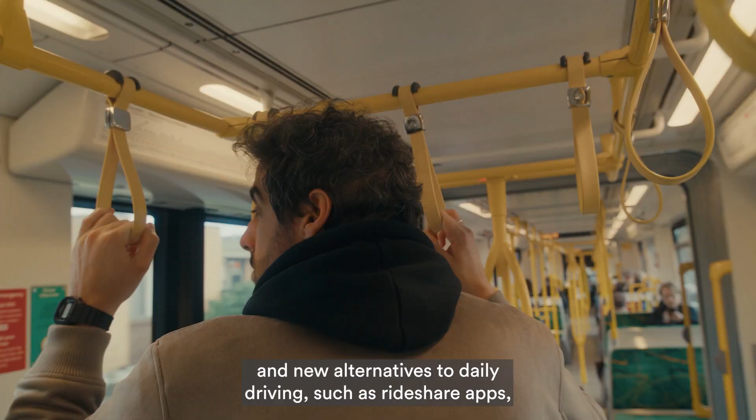However, more recent expansion of mass transit systems, a clearer understanding of the environmental impacts of cars, and new alternatives to daily driving, such as rideshare apps, bicycle share companies, and the prevalence of remote work, has led Americans to slowly reduce their dependence on cars. This car dependence has influenced development policy over the decades, driving the construction of ever more elaborate parking systems.

Today, there are over 2 billion parking spaces in the United States, more than enough to cover the entire surface of Connecticut, an estimated 3 to 8 parking spaces for every car in the United States.

A 2022 driving habits survey by U.S. News & World Report found that nearly half of all drivers have reduced the amount they drive compared with before the pandemic, and over 60% have reduced their driving because of higher gas prices. The youngest generation of drivers is obtaining licenses at a slower rate than any generation before them, trading personal cars for Metro passes and rideshare apps.

Municipalities have noticed these shifts and responded by beginning to eliminate parking minimums for new development in transit-oriented communities. In 2017, the city of Buffalo, New York was the first in the United States to abandon parking minimums. Since then, other cities have followed their lead, from Santa Monica, California, to Hartford, Connecticut. These shifts in driving habits expose the latent possibility for more efficient and less expensive new development.

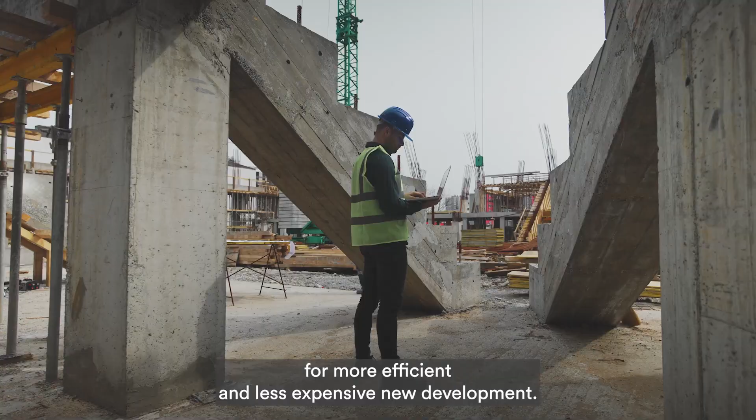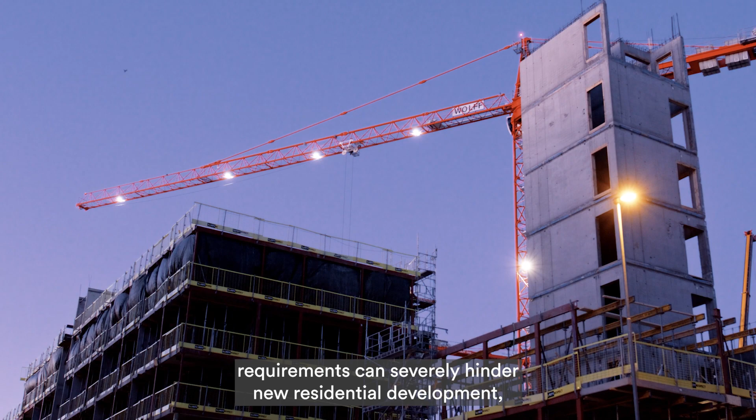According to construction engineering firm WGI, building a new parking structure costs nearly $28,000 per space. The expense imposed by outdated parking minimum requirements can severely hinder new residential development, further exacerbating ongoing housing shortages.

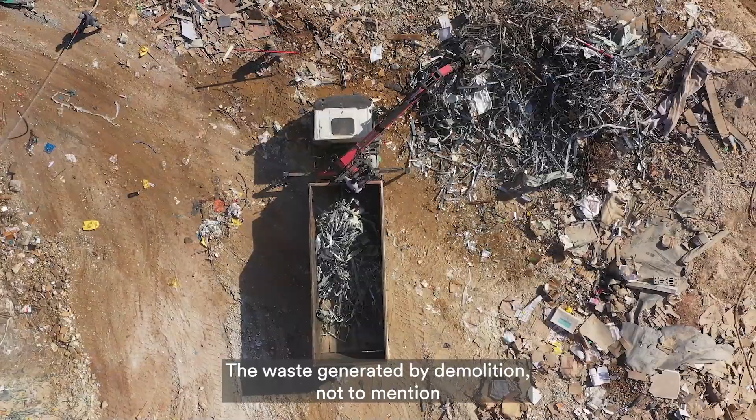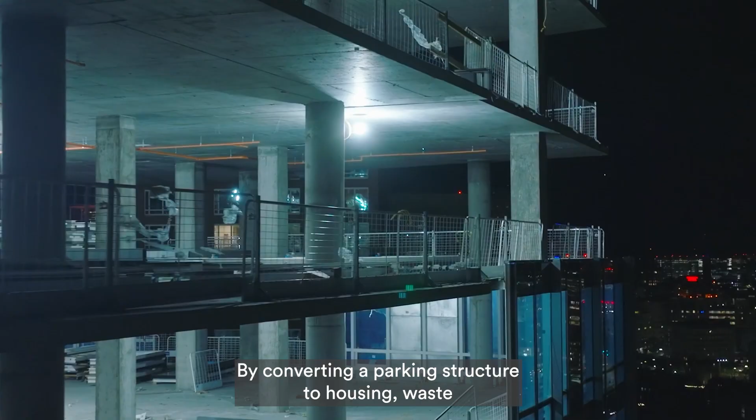Eliminating previously built parking structures will have its own negative impact. The waste generated by demolition, not to mention the environmental impact of new construction, makes adaptive reuse an attractive option. By converting a parking structure to housing, waste is minimized and embodied carbon reduced. Starting with an existing structure and eliminating the demolition phase altogether also reduces the construction timeline.

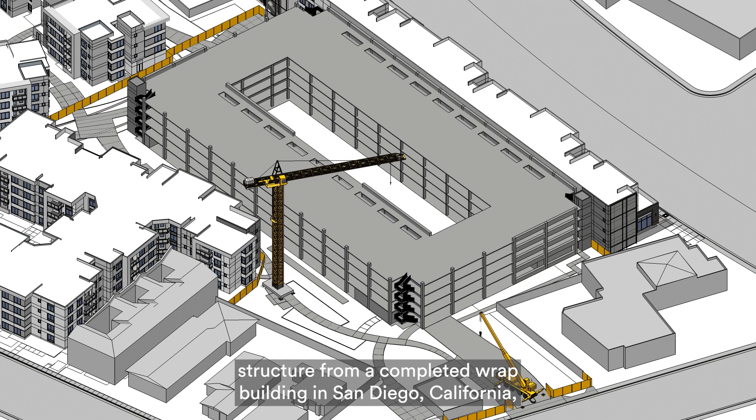A few years ago, KTGY's Research and Development Studio proposed a design concept for repurposing underutilized parking structures for housing. Starting with an existing parking structure from a completed wrap building in San Diego, California, we reimagined the donut-shaped standalone structure, inserting factory-built steel modules to create a new housing concept, Park House. The proposed Park House design repurposed 1,091 parking spaces to achieve 119 one- and two-bedroom units.

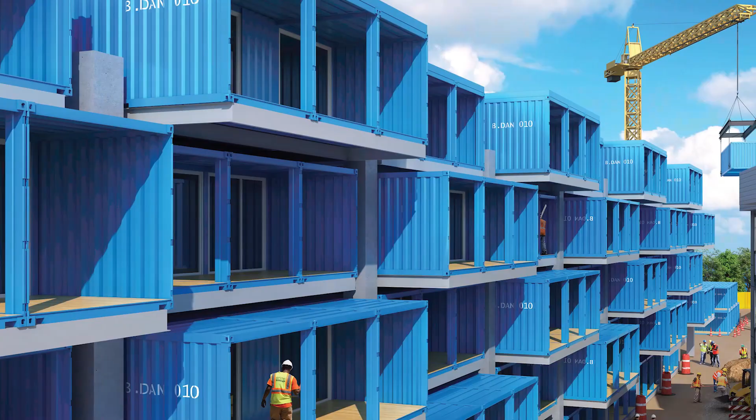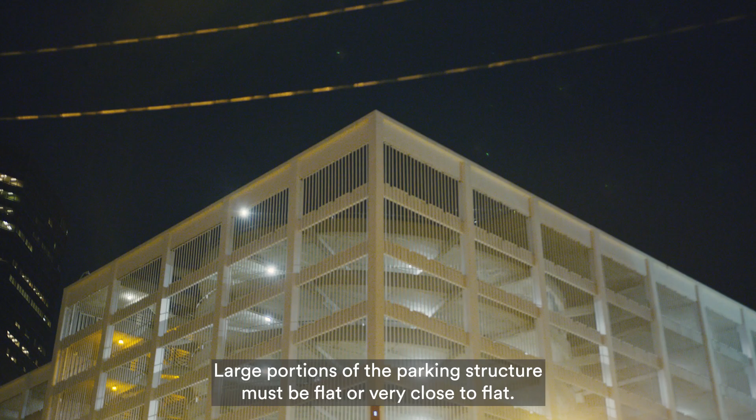Developing the Park House concept taught us some important things. 1. To effectively adapt a parking garage for residential, large portions of the parking structure must be flat or very close to flat. 2. Working around the ramp presents a challenge, but its central location makes it a natural fit for the community courtyard space. 3. Distance between floors should be maximized, allowing for at least 7 feet of clear height within the units.

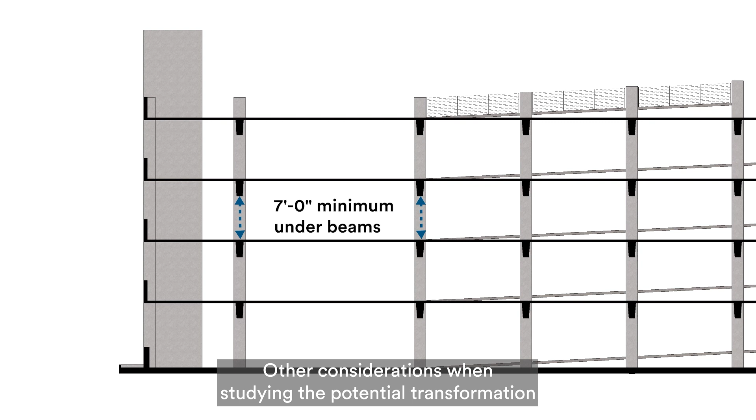Other considerations when studying the potential transformation of a pre-existing parking structure include intrusion into interior clearance height, structural capacity, total building square footage, stair and elevator locations, site access points, and proximity to adjacent buildings.

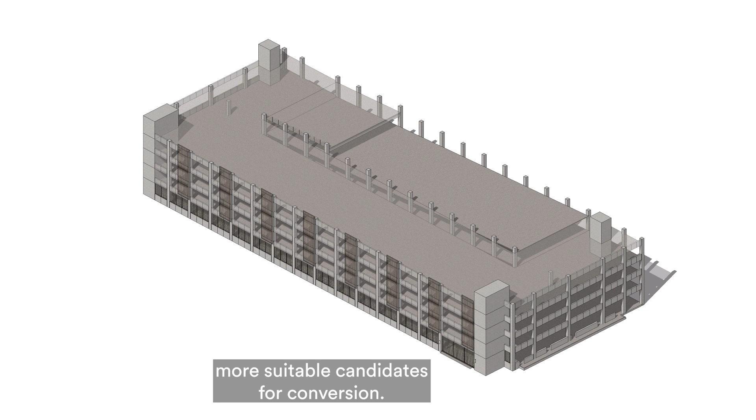Other building features, while not critical, may also indicate more suitable candidates for conversion. A wide column grid allows larger, unobstructed unit areas. It's also important to note that local building height limits may restrict the ability to construct units on the top level of the parking structure.

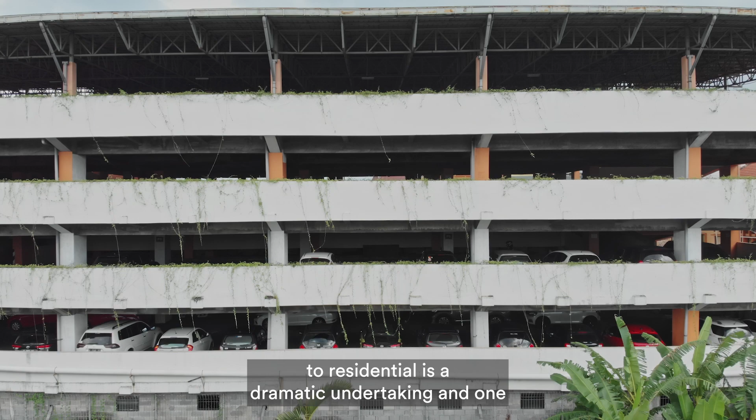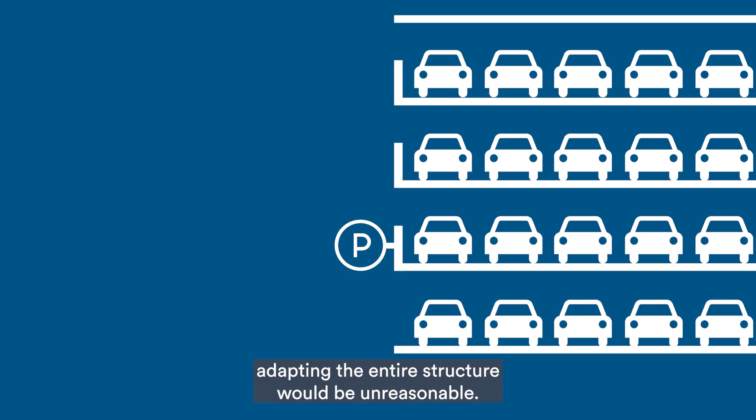We also learned that transforming an entire parking structure to residential is a dramatic undertaking, and one that many multifamily developments won't fully commit to all at once. Consider a parking structure where just half the floors are consistently empty or only a single floor. Adapting the entire structure would be unreasonable. A smaller incremental transformation, however, provides flexibility and reduced overhead, enabling building owners to respond to the needs of residents while adding value to underutilized spaces, all within existing capacity.

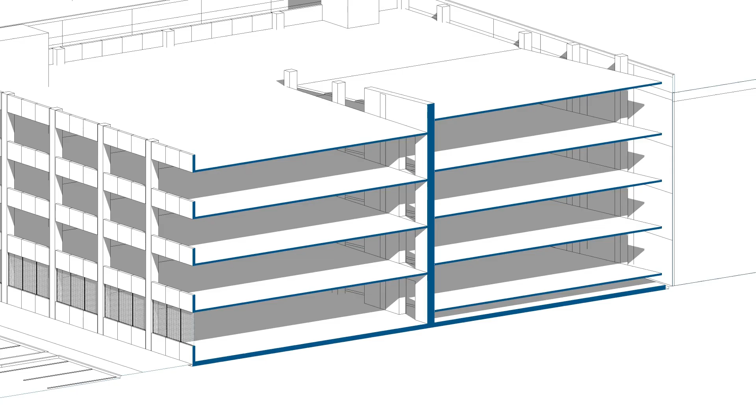Taking what we've learned from our first concept, we've now developed an incremental approach to repurposing parking structures: Parkhouse 2.0. Using the 561-space parking structure from a KTGY wrap building located in San Jose, California, as a case study, the research and development studio reimagined how a parking structure could be modified incrementally, creating a phased approach to this adaptive reuse solution.

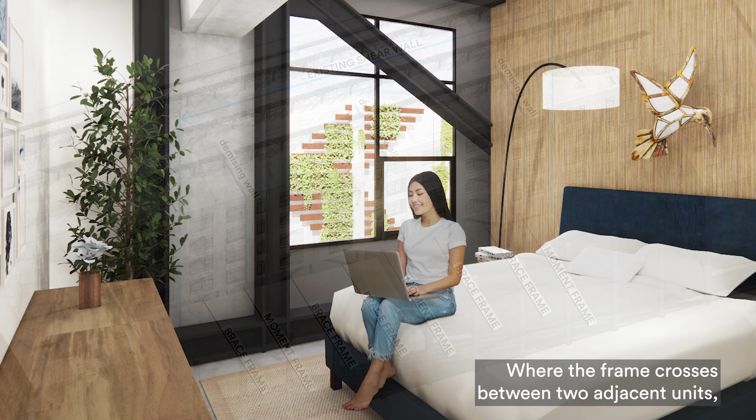To prepare the concrete structure for transformation, first a short extension of the highest portion of the ramp is removed, and the shear wall adjacent to the ramp is replaced with brace frames and moment frames. This allows for the future addition of units in those areas. Looking ahead to where the future units will be located, brace frames are used in places where the entire frame fits within a single unit. Where the frame crosses between two adjacent units, a moment frame is used instead.

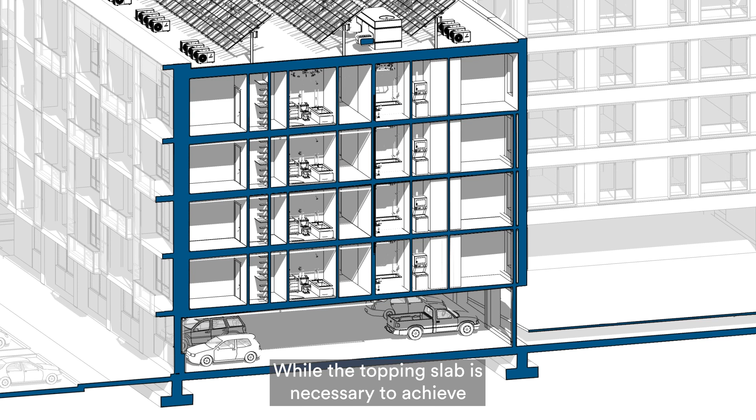To maintain a 1-hour separation between the different occupancy types of parking and residential during each phase of the transformation, a topping slab is added to the parking plate, maintaining a level floor surface and creating the concrete thickness needed for a 1-hour separation. While the topping slab is necessary to achieve building code requirements, it's important to maintain as much height clearance as possible between the levels of concrete.

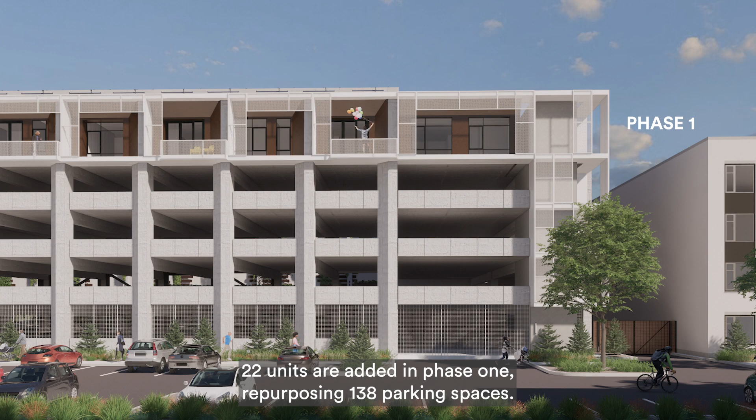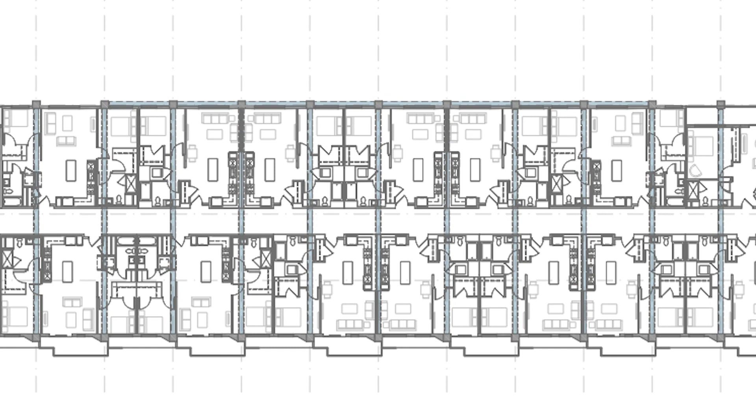The initial addition of units begins with the highest level of the garage. 22 units are added in Phase 1, repurposing 138 parking spaces. A sloped amenity ramp and utility chases running vertically along the exterior of the building are also added during the first phase of construction. Pipes servicing the units run toward the exterior of the building, traversing down through vertical chases running along the facade. All plumbing and utilities run within the existing structural bays to avoid routing beneath deep transfer beams and compromising clear heights within the units. Heat pump refrigerant lines also run within these vertical chases to route from rooftop heat pumps to individual units.

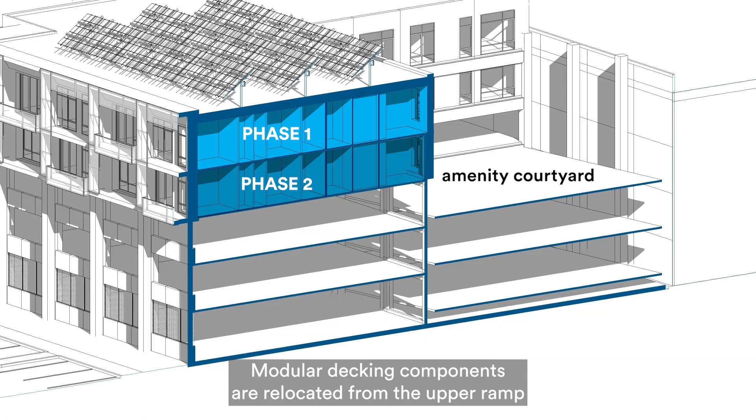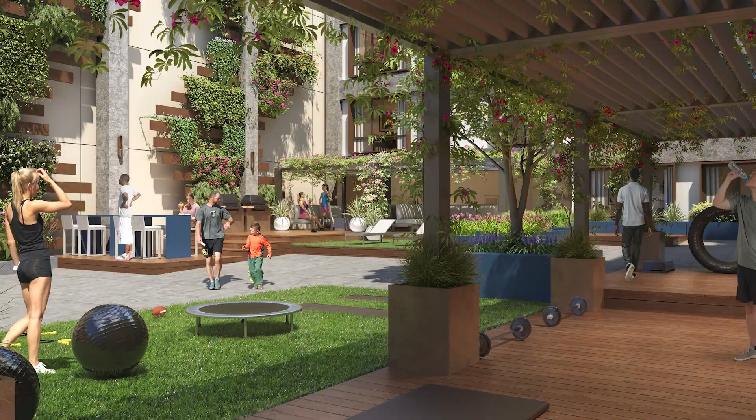During the second phase of construction, the top level of the ramp is removed, forming an amenity courtyard on the ramp below. Modular decking components are relocated from the upper ramp to the level below, creating flat areas for amenity programming along the winding sloped walkway of the pre-existing ramp. In Phase 2, 23 units replace 122 parking spaces on the second to highest level of the structure.

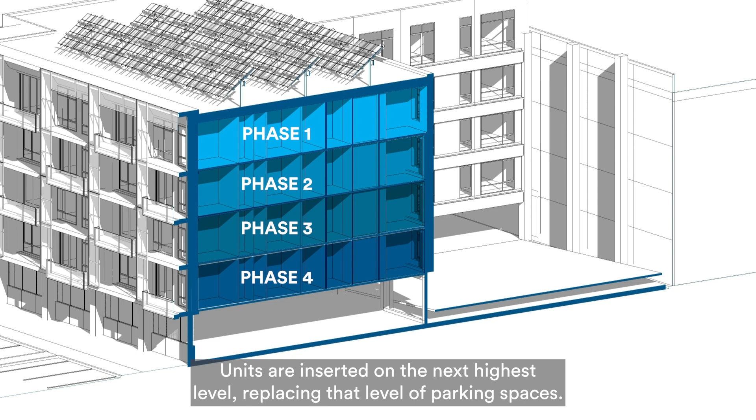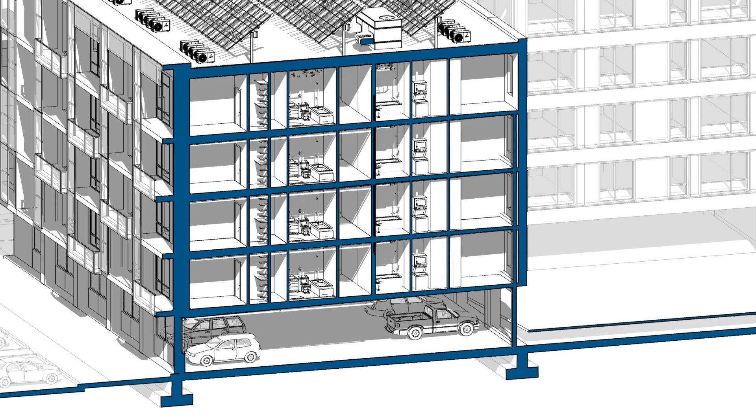Subsequent phases follow a similar pattern. The level of ramp is removed, shifting the amenity space down. Units are inserted on the next highest level, replacing that level of parking spaces. Plumbing and mechanical systems from the newly added units join with the vertical chases placed during the first phase of construction. To minimize the impact of construction on residents occupying earlier phases, a panelized facade easily plugs into the existing concrete structure, attaching to exterior concrete columns. This modular system can be installed in a less intrusive and more timely manner than site-built construction.

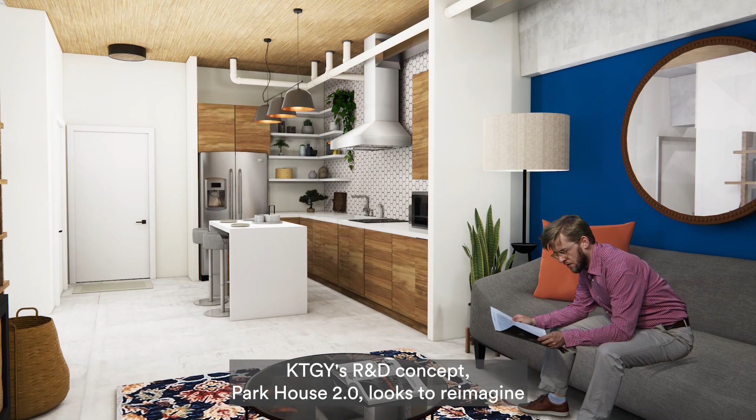With all 4 phases of the transformation complete, the Park House 2.0 design proposes 91 units on 4 floors of the 5-story parking structure, with 59 parking spaces remaining at the ground level. KTGY's R&D concept, Park House 2.0, looks to reimagine parking structures in a phased and incremental way, allowing building owners to evolve their developments to respond to the changing needs of their residents, while capturing value in underutilized spaces. It's difficult to predict how Americans will adapt their driving needs in the future, but an incremental approach makes us quicker to adapt with it.